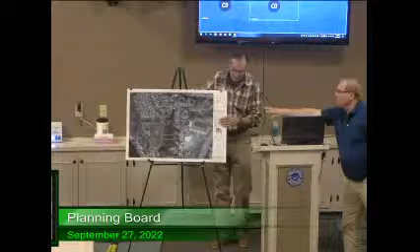Yeah. Is the board okay here? Yep. Okay.

We're here on behalf of Sparhawk Realty for a project that was permitted back in 2016 and 17 for a multifamily 6-unit apartment project. Due to some unfortunate circumstances, the permits were allowed to lapse, so we're refiling for re-permitting of the project.

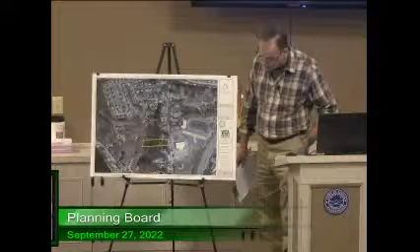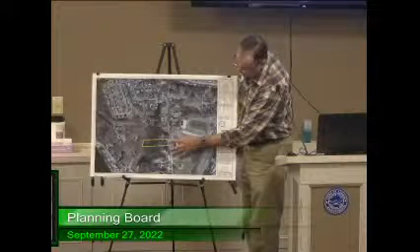I don't know if the board can see, but this is Horgan Skating Arena, so we're directly west of the arena. Frontage on North Oxford Street. Old North Oxford Street breaks off here, and Bryn Mawr Ave has frontage on Bryn Mawr Ave as well. Excuse me, the property is 2.1 acres roughly.

There's a wetland area that bisects the property. We do have a filing in front of the Conservation Commission and ZBA. We've had our initial meeting and a site walk with the Conservation Commission. We have a follow-up meeting with them tomorrow night. This is our first meeting with the planning board.

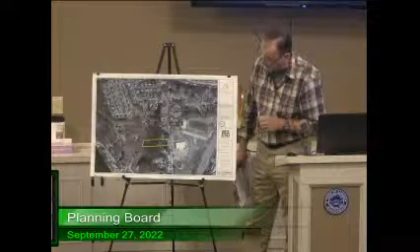So as mentioned, the property contained a two-story, single-family home and a detached garage. It was unoccupied and kind of run down. The applicant received a demo permit for that, and that house and garage were taken down in 2017.

So we've updated our as-built survey to show the contours. The site's fully stabilized where they removed the house and garage. The Conservation Commission during those site walks was like, you can't even tell there was actually ever a house here. They did a good job on the demo.

So this is the layout that was approved. Well, 90% of it is the layout that was approved in 2016 by the ZBA and Conservation Commission.

Then January 24th of 2017, it received the site plan approval from the planning board. So it's still 4 two-bedroom units, 2 single one-bedroom units. Each has an underground garage and an assigned parking space in the front, so it has 2 parking spaces per each.

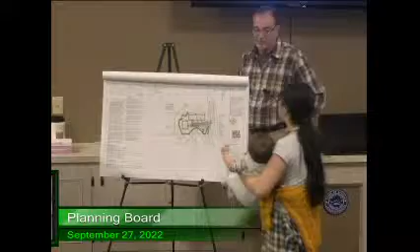Hey, I'm Leo, I live across the street, I've been here for several years. How many families live in these houses? There's no one living in it now. Oh no, I mean when you build the structure, how many families is it meant for? These are two-bedroom units and single-bedroom units, so. Six units, six families. Sure.

You can go behind the podium, you don't have to stand in front. My name is Thomas, I live next door. You have to give your first and your last name. My first name is Thomas, my last name is Henriquez, spelled Hotel Echo November Romeo India Quebec Uniform Echo Zulu. I live at 402 Oxford Street North.

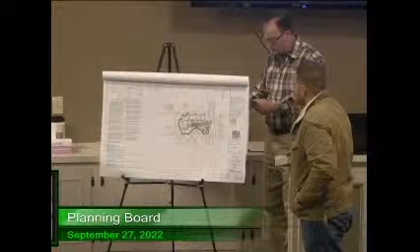My biggest concern is what direction is this draining towards? Because, you know, I don't know if you're aware of it or really concerned about it, but that whole area back there is full of groundwater. And you're shoving 2 giant structures that this property is not zoned for. It's zoned for a single-family dwelling. And you're shoving 6 families into a big concrete cinder block that you're shoving right into the ground.

So I'm really concerned where the water's going, because if the surrounding properties start getting water in their basement, are you going to pay for it? Are you going to do anything about it? Because that whole area back there is saturated in groundwater, and you might be blocking a lot of groundwater.

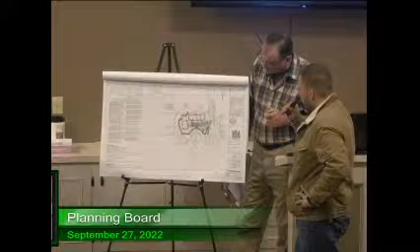That property is zoned for a single-family dwelling, for what I understand. I'm kind of wondering how somebody obtained a special permit to be able to do this. Was it a backdoor deal? Did somebody's hand get greased to do it? I know this isn't your company, this was the previous guy, but this is concerning, especially about the surrounding property and where the groundwater is going to go towards, because that property all back there is saturated.

As far as the zoning goes, you have to go to the zoning board. As far as the recharge unit, we have not yet had the opportunity to read Graves' review. There may be something in there. We just got it tonight, so this isn't going to be voted on tonight. It'll be continued to the next meeting. So we haven't had time to do our due diligence yet to finish looking at the plans.

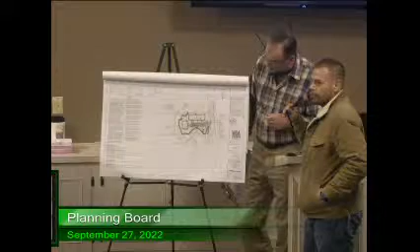Oh, I don't have any animosity towards anybody or any individual. I didn't say you did. Just, I have concerns, and I would like... Oh, absolutely, I understand. Thank you very much.

Yes, the green lines on both sides here are wetlands. We know the area in the back is saturated. But this drops off, let's see, from the road we're at about 580, and at the wetland back here, it's dropping off 5 feet in that drainage. The drainage is going away from your house.

We have test pit data that was witnessed by the town and the engineers. We know the groundwater here, we're well above it. We're meeting the DEP regulations. That was peer reviewed by Quinn and now recently Graves. So we know we're well above the groundwater in the development area.

This does drain through an intermittent channel that's several hundred feet into the site. And this is an isolated wetland here, in between the abutter and us. But yes, this is saturated, that's flagged as a wetland area, we know that. But again, this is 5 feet in elevation above. And we do have 4 test pit data within the site itself.

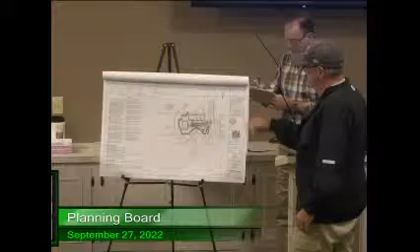Hi, my name's Dave Roy. I live at 410 Oxford Street, the house on the other side. My concern too, that's saturated back there, but in the spring, this is 2 or 3 feet deep here - frogs, ducks, wood ducks, the whole thing. So now they're saying they're going to drain the water this way, which is onto my property. My property comes way over, right to here.

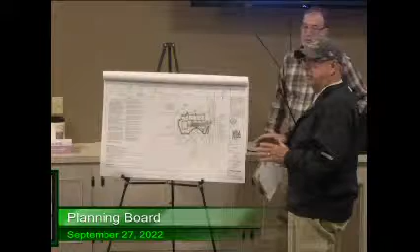And a second thing, I read it over. Now, this is just apartments, right? The original thing was handicap - which I read says it requires 5 acres, so it's no longer handicap apartments, right? It wasn't in the beginning. The first, original developer was going to do 1 unit for his daughter, who was handicap. Now, and then I read on it, and it said a minimum of 3 units per building. So you're going 2 and 4? Yes, that was approved by the ZBA.

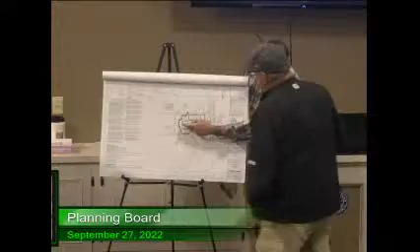Okay, so they cut it down from 3 to... instead of two 3s, they did a 2 and a 4. Okay, all right, so that's been run through the mill? Yeah, this was permitted before, and all they're doing is reapplying now.

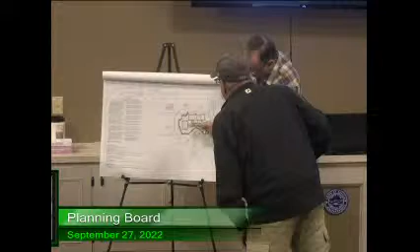All right, and then, in the drainage, what did you say they changed with the drainage? No, the drainage stayed the same. So we have all the roofs and the driveway go to an underground infiltration system. And then if that overflows, you have an interceptor trench that goes to this infiltration basin. So the natural drainage for the site was to this low area near your house. Yes, we know that holds water. And we have to design so we're not increasing runoff from the site.

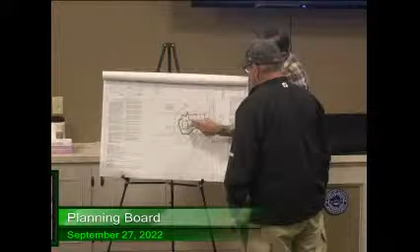That's why you have these large infiltration systems. And that was peer reviewed by the town and the peer review agent at the time, Quinn Engineering, and just recently reviewed by Graves Engineering.

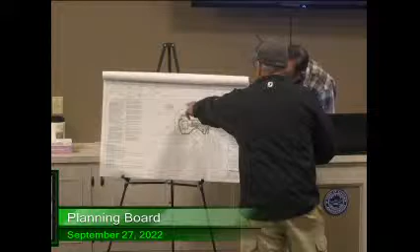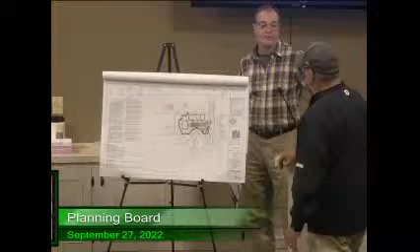If this gets messed up here, the people back here would flood out pretty good. We're not in the mapped flood zone. We know this is a wetland with an intermittent stream that flows from a pond up there and goes through, so there's a whole drainage channel in that backyard, and we're just one part of it. That's why we can't increase runoff off the site. So it's all going back into the ground, being infiltrated. And they're going to have town water and town sewer.

How are they heating - underground propane? No, I believe it's electric, all heat pumps, I'm not sure. Okay, thank you.

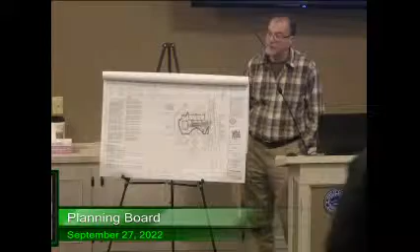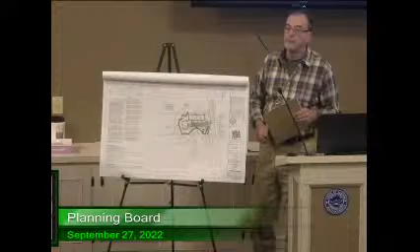Anyone else from the audience? Ron, I believe you had a question. Did you say underground garage, or did you mean under the apartments? It's just themselves built in, not... you wouldn't be able to go underground there? No, I'm sorry, I may have mis-phrased it - it's just a garage underneath.

And how far down did you say the groundwater was? The highest estimated groundwater, mottling or redox, was at 55 inches. Observed groundwater was between 88 and 100 inches below ground. How does that relate to elevation?

The infiltration system is required to have at least a 2-foot separation from groundwater. So we're at...

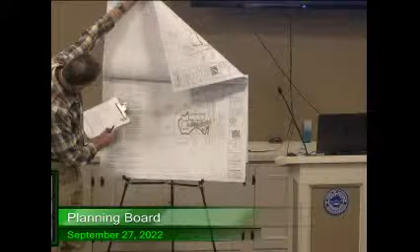The test pit here was about 9 feet below existing grade to the groundwater. What's the elevation - 576? 579. And then the one closest to the wetland side here, test pit 2, which is at about 575, had estimated groundwater with weepage at 98 inches.

So what is the elevation of the wetland out in the back? Do you have that? This wetland - halfway between where your hand is and Bryn Mawr Ave? This wetland here, this is the edge that's delineated, but then it goes back at elevation 574.

I'm just wondering why it's 574, and in the test pit, you're down 9 feet before you hit water - 8 and change, 8 and change, I just couldn't do it on my calculator. That's been a swamp as long as I've been here.

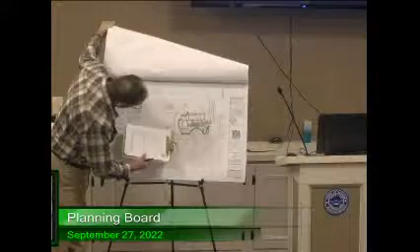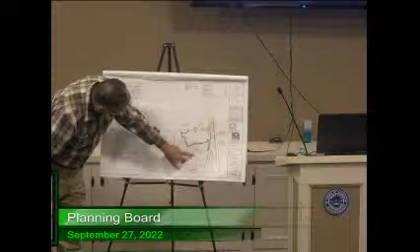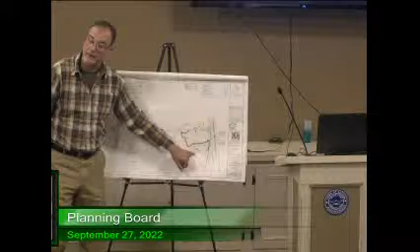Do we know what the high water elevation is in those wetland areas in the spring, an actual elevation? Approximately 571 in here, and it's hard to tell in here, but 573 probably. Because the wetland is up - there's a bit of a bank in here, and this as well. This looks like maybe they historically excavated out gravel, because it's all beautiful sand and gravel in these test pits, and that's why you have that deep bowl there. As the abutter mentioned, it does get a couple feet of water in the spring.

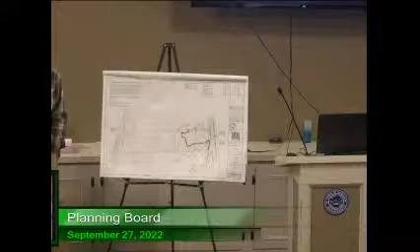Do you have a location where that wetland empties? This one? Yeah, the whole back. So there's a ponded area to the south - this is Dartbrook Reservoir way over here. Along Bryn Mawr, there's a drainage area and a pond. An intermittent stream cuts through this area - I believe it runs all the way down here, then I think that might be where it culverts across the street. But there is an intermittent channel in this area that drains that wetland, kind of where the swamp ends on the north end of Bryn Mawr.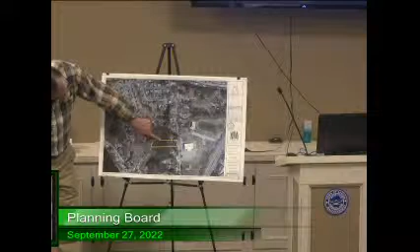There's no brooks running through anybody's place there. It might be piped underground. Yeah, it's thick - when I flagged this, I had to walk in and kind of trip over it, but you can kind of see the channel here where it comes in. I can't make out the rest of the channel just because of the darkness of the photo, but you can see it supporting the pond here.

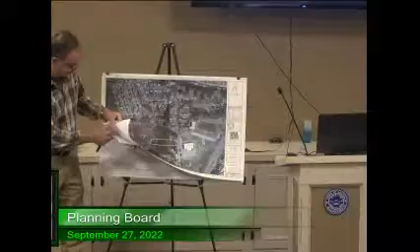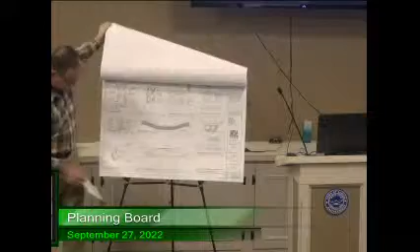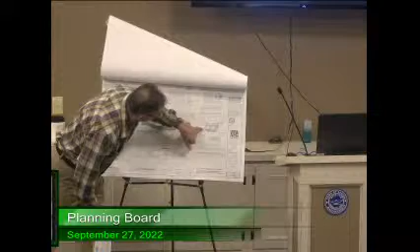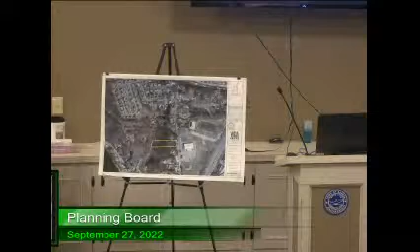Let's see if I have the profile. So the infiltration chamber is a shallow unit underneath the pavement, 30 inches deep, and by DEP they're required to have at least a 2-foot separation. So groundwater's 3 feet down lower than that? Yes, 2 feet below the bottom of the infiltration system is the minimum required.

Marquez, you have any questions? Couple of questions - one is, just for us, has the ZBA review been completed? Oh yeah, October 20th. Okay.

Just looking at the plan again, are there parking spots outside of the garage? Yes, let me go back to that.

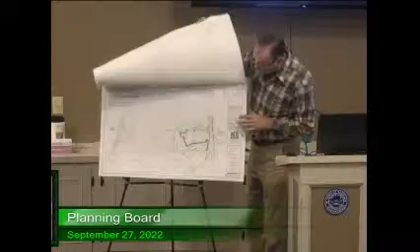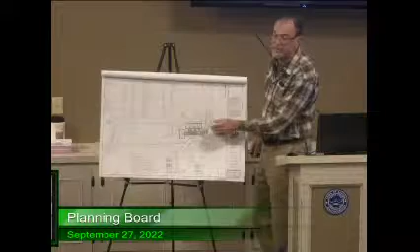Each unit has a garage under, and then a parking spot in front of each unit. Those were just increased from the 18 and a half done in 2016 to 21 feet. Each unit only has one space outside the garage, one outside and one inside, correct, on the driveway. It has a 24-foot wide drive, and we just added the turnout that Gray's requested.

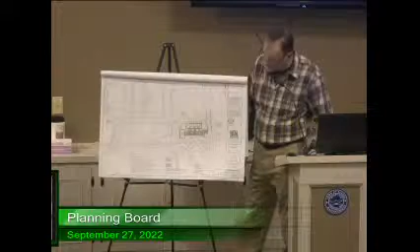One other question was on the sprinkler system - does each unit come with a sprinkler system? The four unit is sprinklered, the 2 unit is not. The fire department requested that we just put a note on the plan that the 4 unit, by code, has to be sprinklered, the 2 unit does not.

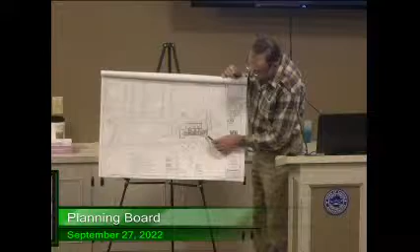Ron, anything else? No, not yet. Go ahead. I apologize, we don't have the same plan that you have here - I think we have an older version, because we're not seeing some of the stuff that you're pointing out. Can you point out where the fire lane is that you said the fire department requested? They asked that we dedicate this side with the striping, and then we've added the R7-1 no parking signs along there.

I did not notice it on the plan, it just says sight distance typical. Did you actually do a sight distance analysis coming out of the driveway? Sight distance was done back in 2016 and 17. Which sheet are you looking at? I just dropped off Adam the new revised plans today. On our plan, I'm looking at C4. Oh, C4? It just says sight distance typical - oh yeah, that was the planting and landscape plan, they just had the sight distances shown on there. That was requested back in 16.

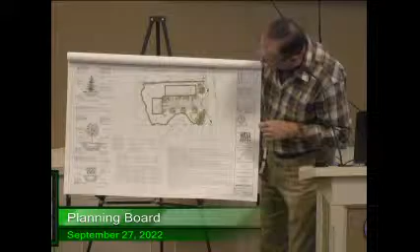So do you know the distance at that point? I don't, but I know it passed muster, so I don't know the exact distance. Is that in an older report, perhaps, that we can put our hands on?

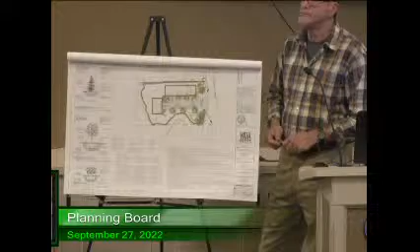Okay, thank you. Also, where you're putting in your driveway, there's currently a sidewalk - what's your plan to restore it? You also have a crosswalk there. The sidewalk ends here, and there's a crosswalk here - if you actually go out to the site, it crosses over and heads towards the police department on that side, and then the sidewalk picks back up on this side. It's kind of a strange setup. Are you restoring the sidewalk through the site? We're not destroying the sidewalk, it ends here at the crosswalk, comes down and stops. We're just tying into the existing edge of pavement, and that edge of pavement goes into Old North Oxford Street. Then the sidewalk ends here in the island.

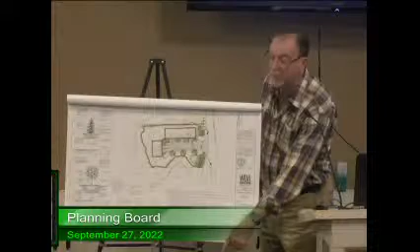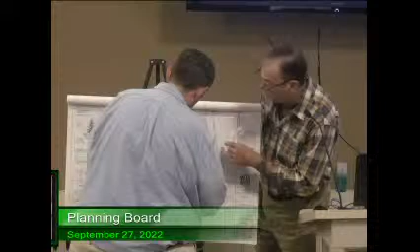Okay, so perhaps I'm looking at an older version of Street View, but that sidewalk continues towards the police department according to Google Street View. It ends at the intersection, and then it picks up across. This sidewalk does go all the way down to the police station if you come to the crosswalk - I guess I'm a little confused. We have sidewalk here, existing crosswalk right here. If you span over, heading towards the police department, that sidewalk continues this way, ends at the intersection, and then picks up again. So this is the pedestrian path to travel - are you maintaining that? I don't know, that's a question I will find out, because I believe that is the end of the sidewalk right there, it just dead ends.

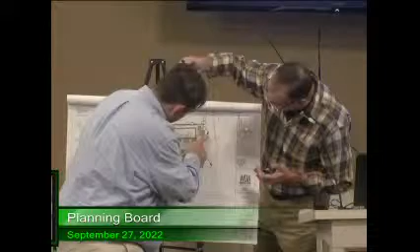So are you disrupting this, are you removing this, or are you continuing it? No, we're just tying into where the edge of the pavement is. You're not removing or disturbing the sidewalk at all? No, not disturbing it - this is all staying, that pavement is staying. Are you disturbing that? No, we're not disturbing it - our tie-in is right here. So you're not disturbing what's there? No. Okay.

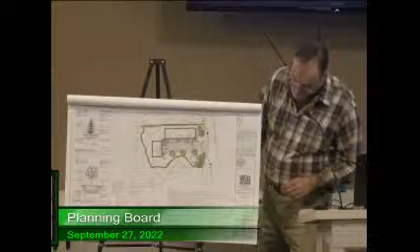Anything else, Todd? That's it for now, but I have a few questions.

You're going to be feeding 6 units off a 2-inch water line? If I go to the utility plan, it shows on the plan. Let's see, the utility plan shows a 6-inch water line going to the 4 unit, and then there's another 2-inch line coming in here.

There's a 2-inch line going to the first unit, a 2-inch line going to here, and a 6-inch for the fire sprinkler on the 4 unit. Do you see that on the plan?

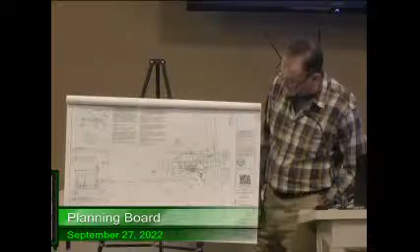On the utility plan, C3.01, you show a tap and sleeve and valve with an 8x2 reducer, and then a 2x2 T, so I don't know where your 6-inch line's going in. I don't see it. Right here on this corner of the building there should be a 6-inch line shown. That must have been added, because it's not on this plan. Maybe it was shut off, but on the new plans submitted, that's the same plan you're looking at here. There's a 6-inch for the sprinkler, a separate 2-inch line, and a separate 2-inch line to the other 2-unit.

So in running the separate 2-inch line, does that run into the first unit and then run through all the units off of that, or do you bring the 2-inch line down and put each unit on its own service? That's a good question, I'm not sure. It looks like it's being fed just with the 2-inch line. I don't think you can feed one apartment off another on the same line, I don't think that's code.

Same with the sewer? No, the sewer, they all have their own lateral out with a clean out in front in the driveway.

That leads to my next question: which way does the sewer flow on Oxford Street, north or south? I would say south, because that's the slope going down. If it flows south, you've got a problem, because where you're tying in, that Y is backwards. That Y should be flowing toward the word that says north on North Oxford Street.

If it goes the other way, you're going to be entering 6 units into a main backwards. You can't do that. I'm surprised this hasn't been caught by the sewer department yet, because I'm surprised they're not making you put a manhole in the street and running an 8-inch line in instead of a 6-inch line for 6 units.

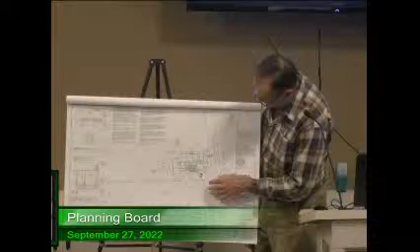Yeah, they had us add a manhole right off the edge of the right-of-way right there. Well, I see that, but I'm surprised they didn't make you add a manhole in the road, because that line should be 8-inch, not 6-inch, for 6 units. Look at it this way: if you had a dead-end street with 3 houses on each side, you would not run a 6-inch line up with 6-inch Ys. It would be an 8-inch line with 6-inch Ys. That's standard.

I'll get that answered for you.

So as it is right now, you plan on coming off a Y off of the main and putting a manhole inside the property, 6-inch? There's a separate manhole just off the right-of-way, and then from that manhole to the main in Oxford Street is a 6-inch line, not an 8-inch line. It's a 6-inch service that was put in back in 1978, should be transite pipe in there.

My next question is on your paving schedule, page C5.00. Your table is kind of messed up because it says concrete walk half-inch and half-inch, then concrete road passenger car parking area half-inch and half-inch, and then concrete road truck and heavy traffic is 2.5 inch and half inch. No one puts down a half an inch of paving, not first coat, not second coat.

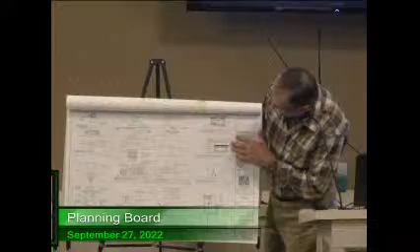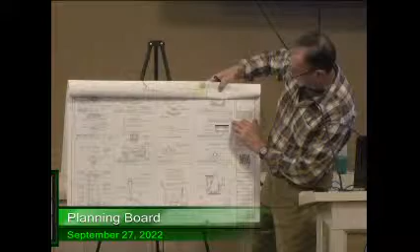Which detail are you looking at? I'm looking at page C5-00, your table, right there on the right-hand side of the page shows all your depths, right where your hand is. Yep. You're showing half-inch and half-inch. No, that's 1.5, it's just - that's not what it says. Oh.

It's out of the Excel part of the thing, the drop down, but it doesn't show inch and a half, it shows half inch, 2.5 and a half inch. The heavy duty should be 2.5 and inch and a half. Yeah, it's just a typo, but we'll get that fixed.

So the only portion that should be 2 inch and inch and a half should be the actual driveway from your separation, and the rest of it should be 2.5 and inch and a half, because you'll have heavy trucks going in there for repairs or whatever. Right, not a constant traffic flow, but still the driveway needs to take plowing, not gonna be little trucks.

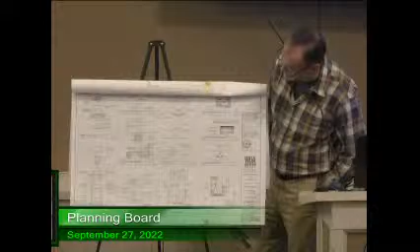He's got heavy traffic, 12-inch, 2.5 — that's supposed to be 1.5, that's a mistake. Yeah, it just says 1.5, you can't see the ones. We'll get the detail fixed. Rest of the details look pretty good.

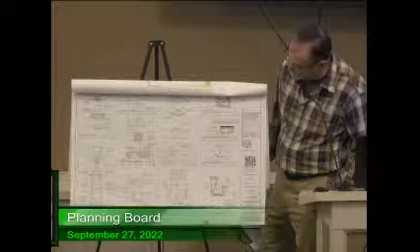On your catch basins, are you going to put hoods in them or not? I didn't see that on the detail.

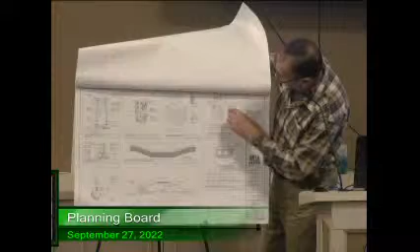Catch basin, contact — yeah, it says orifice, plate, and hood. You've got to put Stormceptors? That's the intent, yeah, Stormceptor.

Okay, and what do you have, 2 catch basins or 3 catch basins on site? It's hard, we only have the mini plans, so it's hard for me to tell — the full-size plans are over there.

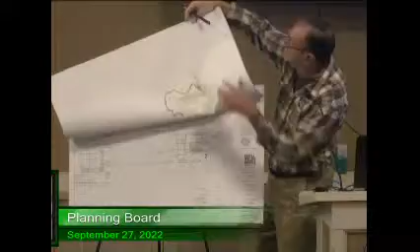So let's see, he's got a Stormceptor unit here. Then he's got another DMH there, which is a deep sump with a Stormceptor. And there's 2 catch basins on the whole site?

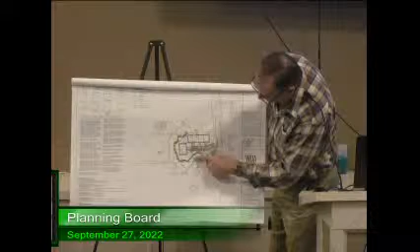Down in that corner, then there's another one down by the corner. Yeah, there's one up by the left-hand corner, near where both buildings meet, and the other one's down at the outlet of your infiltration unit. Everything's pitched to drain down to these, the 2 units down here with the Stormceptor units.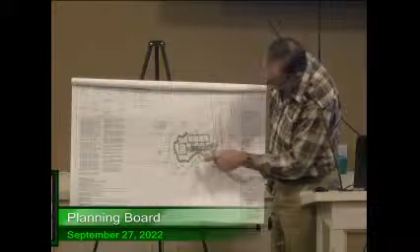On the catch basins, on the utility plan, I don't see a rim elevation — maybe I just can't see it. I see invert elevation. It's on sheet C3, the grading and drainage plan. That has all the rims and inverts, I believe.

And the roof drains come out of the units, the 2 apartment units, and that goes into 1 manhole, correct?

It'd be the top left side, right where the 2 corners meet of the 2 buildings. Yeah, right in there, there's a catch basin, I believe. And that's where you show — I can't tell if it's a roof drain, but I'm assuming your... okay, roof you've got drains, a foundation drain.

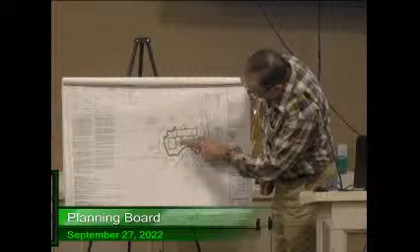Then you've got a line coming out here into DMH1 before it goes into the infiltration system. I just can't see the rim elevation. Catch basin,

579.8. There isn't a ton of pitch between the first unit, or the 2 units toward the bottom of the page, and where it goes into the little detention basin, which is only 2 feet deep.

Well, the driveway actually pitches from the roadway to the house by a tenth, according to your finished floor elevation and your elevation near the road.

Yeah, the catch basin, that's the low spot there, it's at 579.8. So this pitches down slow to here. The driveway from that unit pitches down to these two, and the top of that catch basin's at 579.8, so it's 4 tenths below.

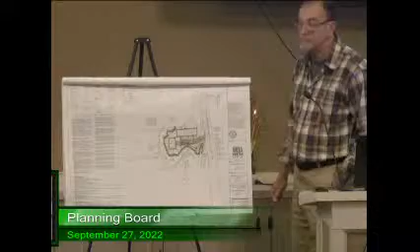Do these units, are these built on slabs? No cellars? No, I don't believe there are any cellars, I believe they're slab.

That's all I had for now. Anyone else? Go ahead, Ron.

Are these units going to be individually owned, or one owner who rents to the other people? I'm not sure of that. I believe the goal would be individual owners, but I can get that answered for you.

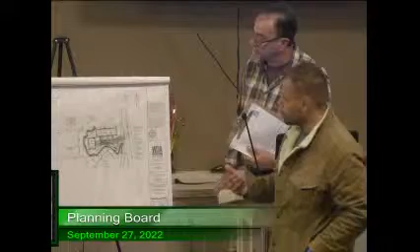Something I'd like to address: when the groundwater was measured for this property, it was done during the middle of summer. I would like to really see where the groundwater is during the seasons where the town of Auburn doesn't care when we're watering our lawns, because during the middle of summer it really doesn't matter where the groundwater is — it's not going to be impactful on us neighbors. However, during the seasons where the groundwater changes, it will be severely impactful.

When they bring out the PE to dig the test pits to check for groundwater, they can tell the high spot of the groundwater by the ground — believe it or not, they can. They don't have to do it in the spring. It's done by what's called induction modeling.

It used to be, back in the day, you couldn't dig a test pit for a perk test or anything after March and April. Now they can do it year-round because their technology is so good, they can model it and tell you exactly where the high water level mark was that spring, and where it's constantly like that in the spring. They can tell.

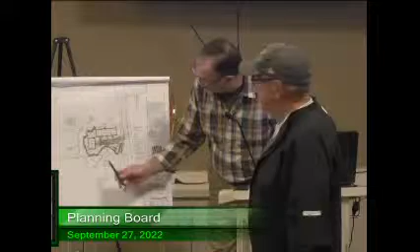410 Oxford Street - so 9 feet between the groundwater and the elevation they're going to build. I don't think there's 9 feet at this corner and that wetland. The corner of this house is at 577, and the wetland is down here at 573. That's a 4-foot difference, so it's about 4 feet from this corner down.

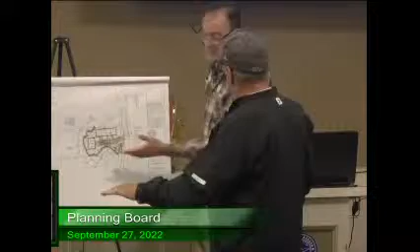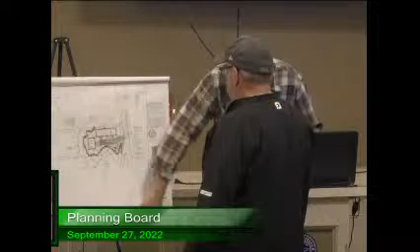So is that enough? Isn't the groundwater the same as the level of the wetland? No, not always. The groundwater, especially in a gravelly soil like this, is usually fairly flat and consistent, but everything drains a certain way - there's a divide farther up the street. Some drainage goes that way, and the rest comes back down towards the police station.

So the groundwater isn't the same as the level of the water in the wetlands? No. A lot of times it's close, and when we auger through... I think the confusion might be that this is 8 feet above that wetland.

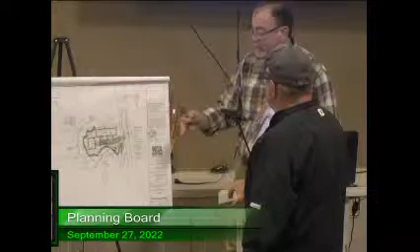But we're infiltrating here. We had to design it a certain way - DEP has certain requirements for where we can put our infiltration, and it has to be a certain distance above the groundwater. The corner of the house and the slab is 4 feet above that wetland. Oh okay, the infiltrator is where I got the 8 feet.

Right, but I think the confusion comes in where they want to know the groundwater elevation. What they really want to know is what the high water is there in the spring versus the foundation floor of that house. The groundwater doesn't matter because it's a slab - that's why we have to show the estimated seasonal high groundwater.

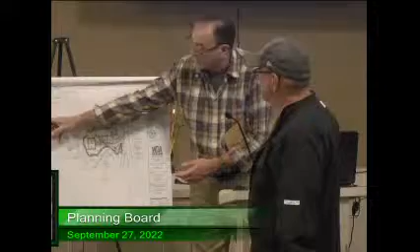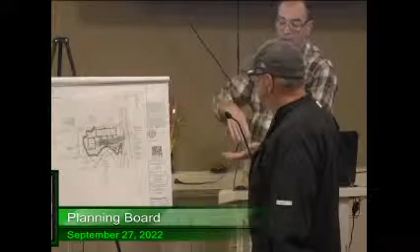He noted where either they saw standing water in the test pit, so they may say, okay, that's at 100 inches. But if he sees what's called redox or mottling, which means that water in the spring is sitting up here and leaves deposits on the soil, then that's what he estimates for the seasonal high groundwater. That's what they're held to by the Board of Health and DEP. So even if it's a dry year and you don't see groundwater, maybe you see a seep at 12 feet, your groundwater can be several feet above that based on that model of redox material.

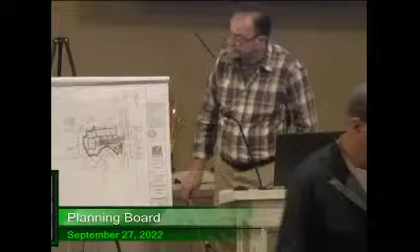Anyone else in the audience have any questions? Anyone else on the board have any questions? May I have a motion to continue to our next meeting for October 11th?